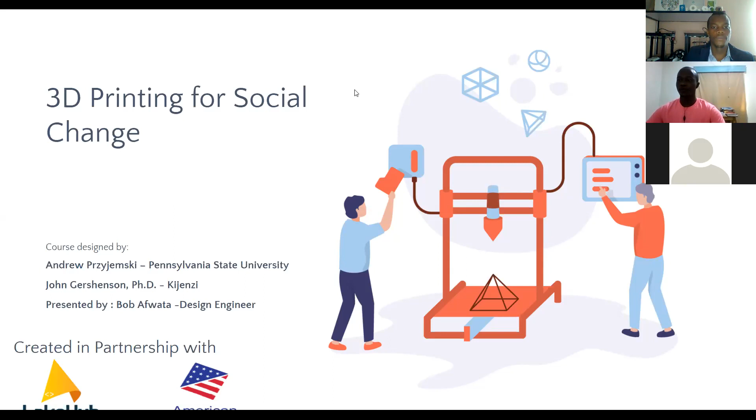So we are going to start with the first lecture. The course consists of 7 lectures or 7 classes. Around 3 of them are going to be theory, online on this platform on Zoom. Remember, we have 2 sessions, 2 cohorts: those doing the morning session from 10 a.m. every Saturday to 12 p.m., and those starting from 2 to 4 p.m.

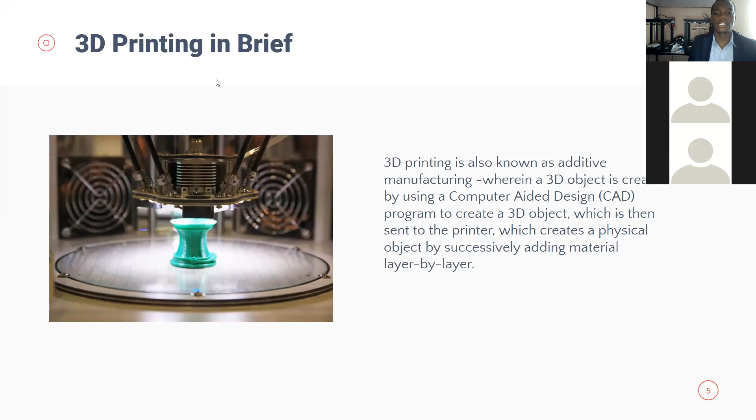Just know it is additive manufacturing, meaning the process works by adding material successively layer by layer, compared to other processes which remove or cut away material, such as CNC milling and laser cutting. So laser cutting and CNC milling are examples of subtractive processes, while 3D printing is an additive manufacturing process.

So why do we really need 3D printing, or what is the rationale behind 3D printing? 3D printing is a big business.

I'm telling you that the top manufacturing companies - if you go to top aviation companies, Boeing, Tesla, Airbus, NASA - there are 3D printing parts. And we are going to see that in the applications.

So it's a billion-dollar company, a billion-dollar process or market. It's a multi-billion-dollar market that is growing rapidly, and it's expected to continue growth into the future.

According to research, what is fueling 3D printing is that patents people applied for are just beginning to expire - some of them have already expired. That has made 3D printing pretty much very open, and people are really using those patents to build great 3D printers. The technologies have improved, like the precision of the laser or the motors used in 3D printing, and that has really spurred growth in this market.

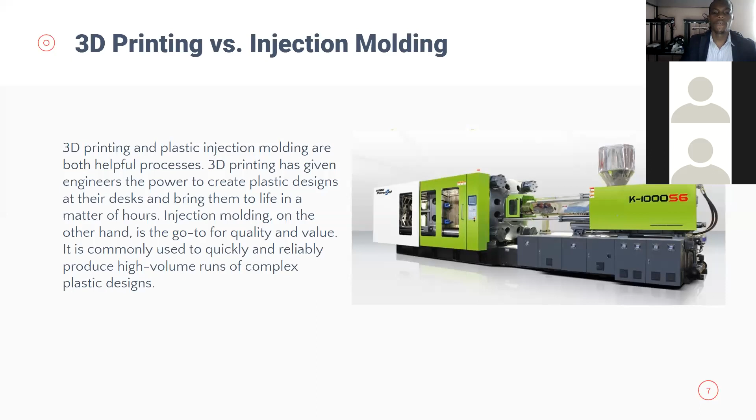It's a fast process, yes, but it cannot be used to manufacture 1,000 units at once. It can only be used to make prototypes or proof of concept. So if you compare the two, there is something called tooling cost.

Tooling cost is the cost of making a tool. In this case, there's something called a mold, which is used by injection molding. So if you want to make a mold, it's usually done using a CNC mill, milled or cut out of metal, wood, resin, or some other material. That cost is usually very high in injection molding.

But once you design it and mill one mold, you can be able to make maybe even 100 units at once. So due to the high cost of tooling, injection molding is economical for runs of hundreds of thousands of parts.

So if you want to make a cup, for example, or a syringe for biomedical use, if you look at the syringe, the inner part is made out of plastic, and the plunger is also plastic. Those parts need a mold, and that mold will have maybe 100 syringes in one block. So for every run, you'll be able to produce 100 syringes.

Making that part in the first place has a very high cost, but after you've made it, then it can produce at one point 100, at another point 100, even 100 units per minute. So by the end of the day, if you run the machine for like one day, you have produced almost 1 million syringes. So that is how they compare.

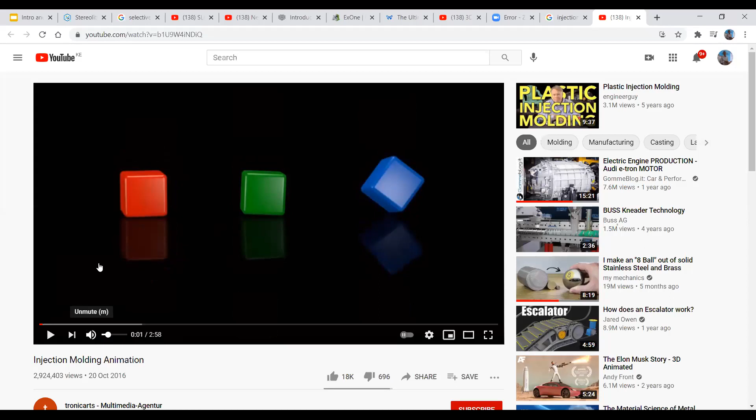Okay, so I have got a video which I need to show you. Just one minute, it's loading. I'll mute it but share the video link so you can see. Can you see my screen, on YouTube? Yes.

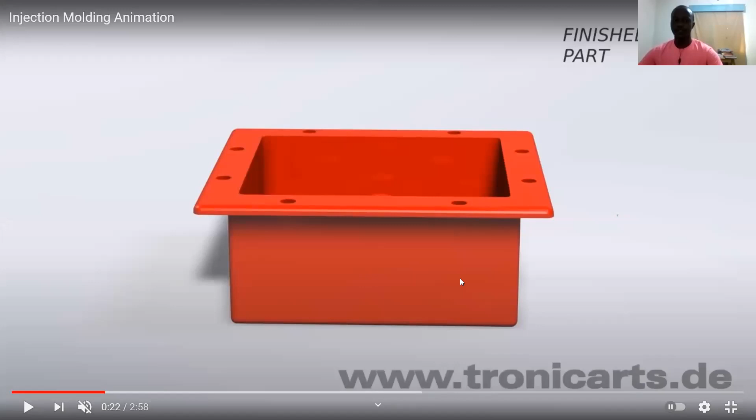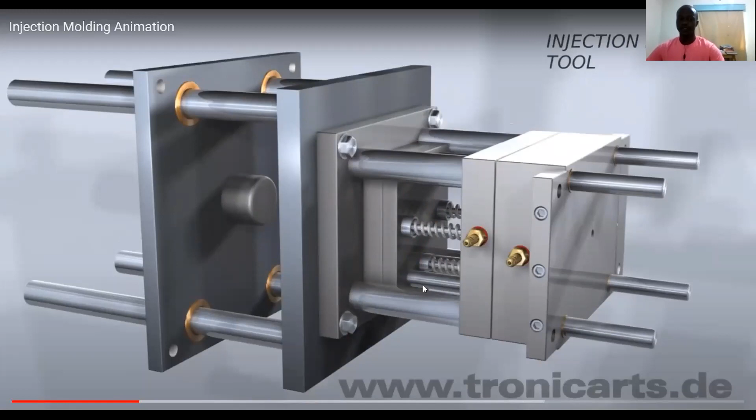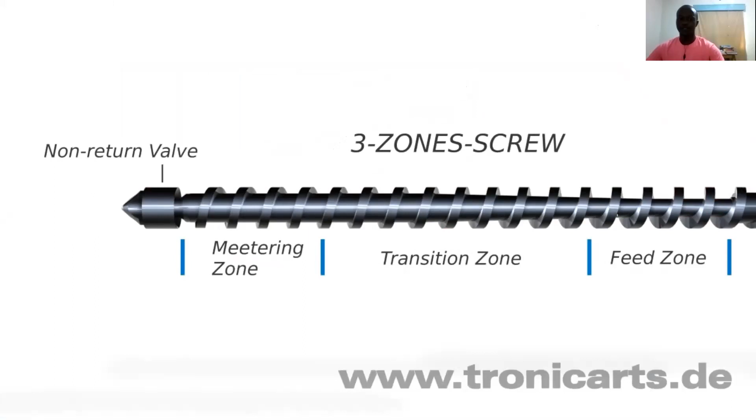When it gets heated up, it melts into liquid form. From solid plastic it becomes liquid, more or less like porridge. Then it's pumped into the rectangular closed chamber. So that's the plastic pellets being poured inside there. The black parts are heating elements, just like a coil. You can see that screw rotates to make sure the plastic is uniform, like it's being stirred, and then it's pumped into the enclosure or chamber.

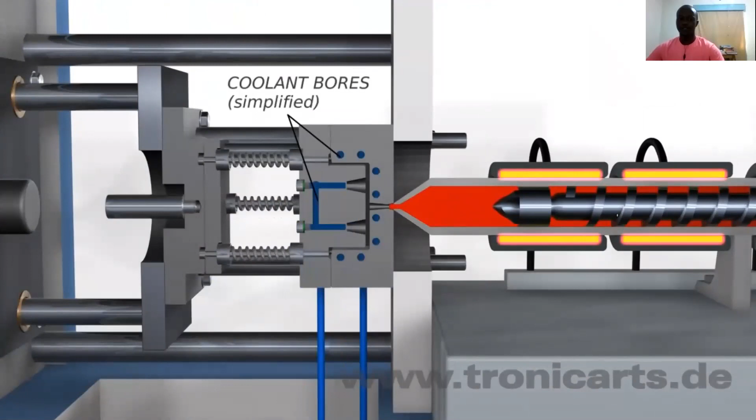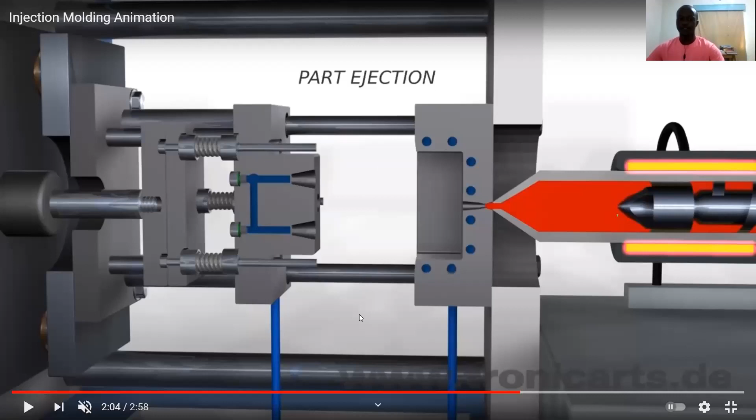Once it is pumped, because you have a pattern called the mold, it's allowed to form inside that pattern. Then your part, in this case a basin or a cup, cools and is dropped off. The middle part is what is called a mold, those two metal parts, one moving away and one moving towards the other. So it gets filled inside there, and then the plastic or your part gets dropped down, cools, and gets dropped.

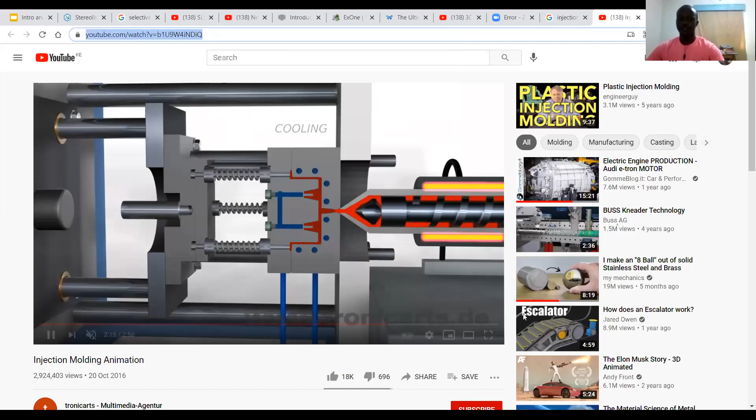Is that much clearer now, what molding is? Oh yes, it is, Jacob. Yes, so it is, but I have a question. Yes, ask a question.

My question is, do you need a specific printer for a specific design, or are you able to replace the mold for each kind of design you want? Because the shape of the mold looks like the basin you showed us earlier. So is it adjustable, or are you able to change that mold in the machine?

Yes, once you buy a mold with a specific machine, that mold is also designed. So if you are making different things, if today you're making a basin, you change that part. If tomorrow you're making a cup, or the next day something else, that mold is what you change. The mold is what you design, and then you change it in that machine. Using a 3D printer or a CNC machine, which is a milling machine. In industries, you go to places like Ken Poly, the guys making basins and cups. Most of the plastic you have in your house, like pails, are made there. They have various molds for various types of plastic, cups, plates, and all that, so they just keep changing them. If they want to make plastic cups, they put in the plastic cup mold.

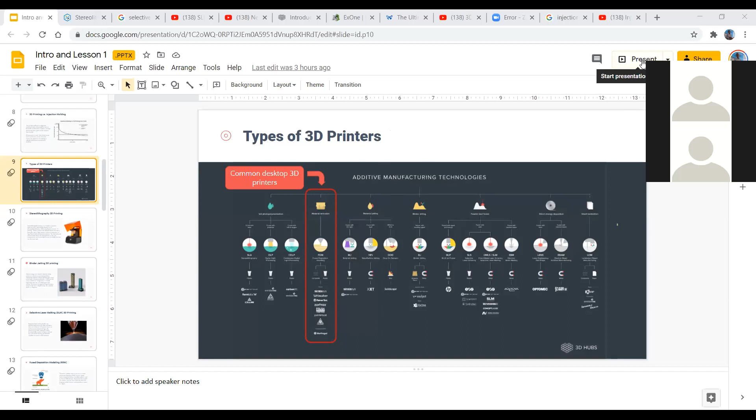I think they have educational tours as long as you let them know in advance. But I cannot promise to be the one taking you there unless you do it yourself, or maybe you can send me as your emissary, I can go there and try to talk with them. We can talk about that after the event. Those who are interested in seeing how injection molding works, I have seen it myself, but for those interested, we can go.

Before we begin, can I ask a question? The pellets, plastic pellets, do they have to be of a particular make or brand, or can you use any recyclable material as part of the pellets that are put in? You can use any plastic material.

But these materials are being treated. You cannot just take plastic like in your house and feed it there, because the plastic in your house may have something that has happened to it. The pellets are special, just normal plastic, but they have been treated with chemicals, they have been hardened, their properties have been changed so that they can melt easily and coalesce. When they are in the machine, they get stuck together and form that part easily.

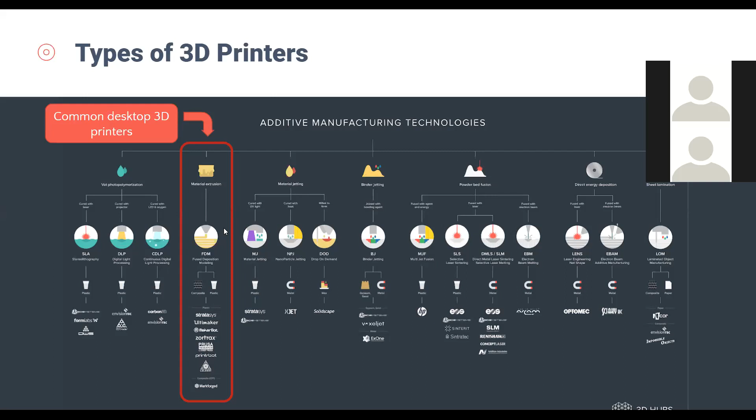So the first kind of 3D printing is called stereolithography 3D printer, or in short, SLA. Just know it as SLA 3D printer. Stereolithography is actually a chemical process. Before we even go to 3D printing, stereolithography is whereby you are using light - the light can be a form of UV light, ultraviolet light, or what is called laser. This laser light source, when it hits onto a material - a polymer, in this case one very common one called resin - that material gets heated, it gets hardened up. It turns from liquid form to solid form, it gets hardened. That is the process of stereolithography.

So how is it used in 3D printing? I want to show you a video here very quickly.

I'll also share this video at the end of the lesson, but this is how it works. It's a very short video.

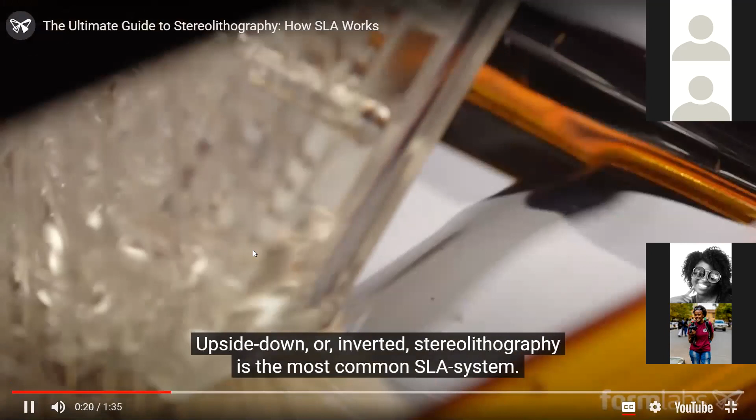So the first step, you've seen that he has explained.

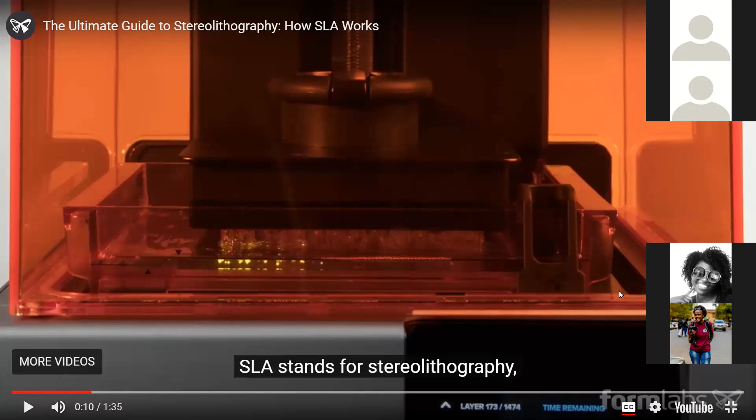So there is a resin which is in liquid form. There is a bed which is being lowered, and on that bed is where you are going to print your part. And you cure it - the light source is brought from behind or from below. The basic principle is that the light hardens the liquid resin, converting it from liquid to solid form. And then the part is formed, so you can be able to see.

So the light source is guided by this, it's some advanced mechanism, think of them like lenses or mirrors which guide the light source. The light comes from the bottom, and you can see the shiny or bright parts at the bottom. Then it hardens the liquid, which is in a bath or some form of a basin.

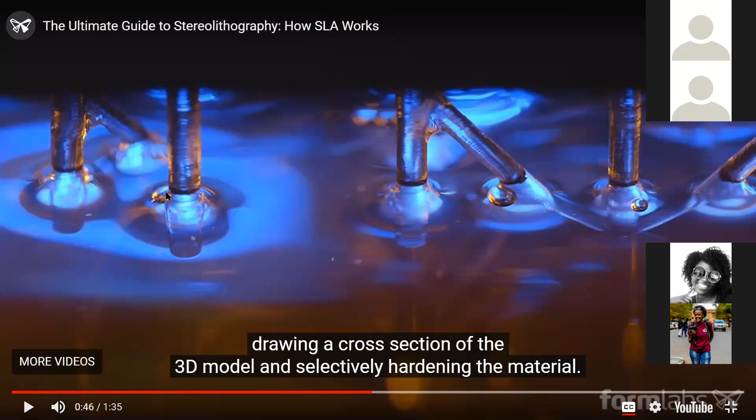These parts are hardened and your part is formed. So after hardening each layer, the bed where you are printing on gets raised up, and then you pour a new resin. Then after pouring a new resin, you harden it again using that laser, and as you do it consecutively, you form your 3D part. So that is what SLA or stereolithography is.

So in short, stereolithography belongs to a family of additive techniques known as VAT photopolymerization. Just know that it comes from the word photo, which means light, and polymer is a form of plastic. So these are forms of plastic which, when they get heated up or when you shine a light source to them, it changes its form from liquid to solid. So that is what is used here.

So a light source, these machines are built around the same principle, using a light source, in this case a laser or a projector, to cure. The process of hardening the liquid to form a solid is what is called curing. So you cure the liquid resin to form a hardened plastic.

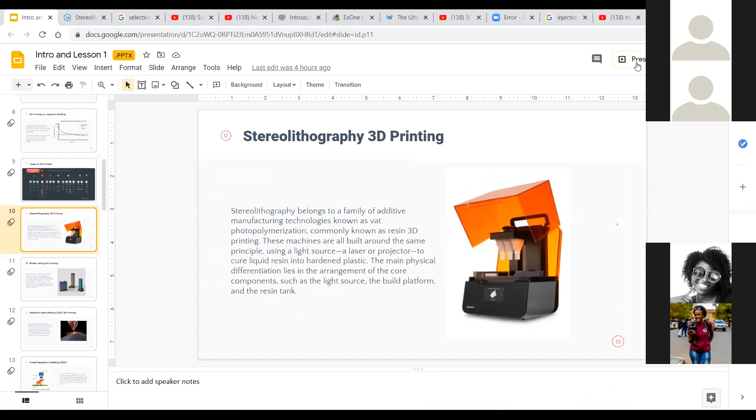Is there any question before we continue? Like how it works? Anyone with a question of how it works?

Yes, Bob, I have a question. You said in 3D printing we do a layer by layer addition—is SLA also using the same criteria? Yes, SLA also works in the same criteria.

Okay, so let's say you want to print this, then you lower the bed from the top. As you lower it from the top, the bottom is where you cure. So in this case, you are curing from the bottom, one layer upon one layer, as you bring this up on top. So that is how SLA works.

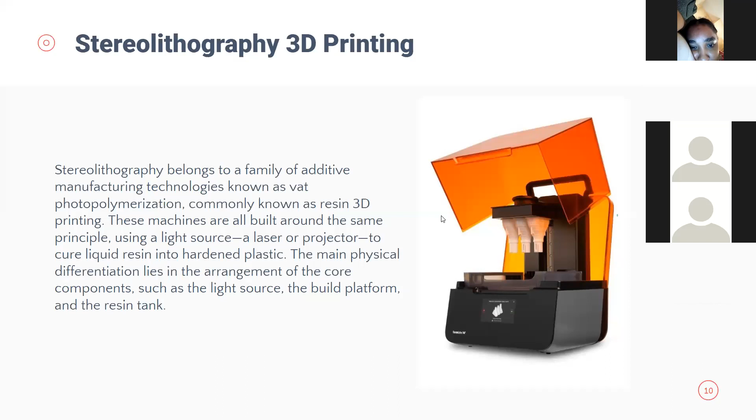Okay, the next is called binder jetting. So from the word binder—to bind something basically just means you have two solids and you want to bring them together. That is what is called binding. So in this case, I'll also share with you a short video of how binder jetting works.

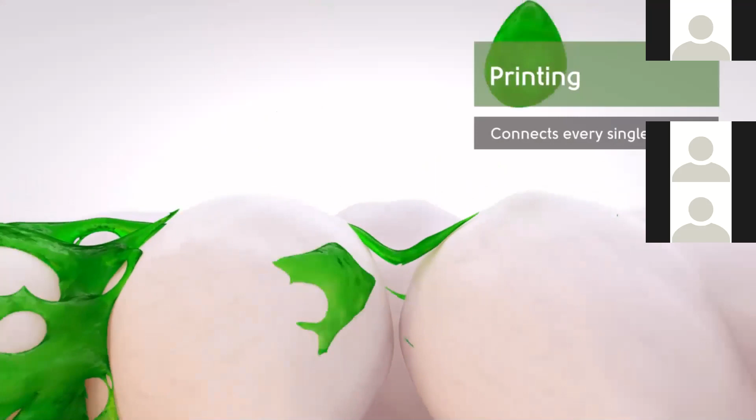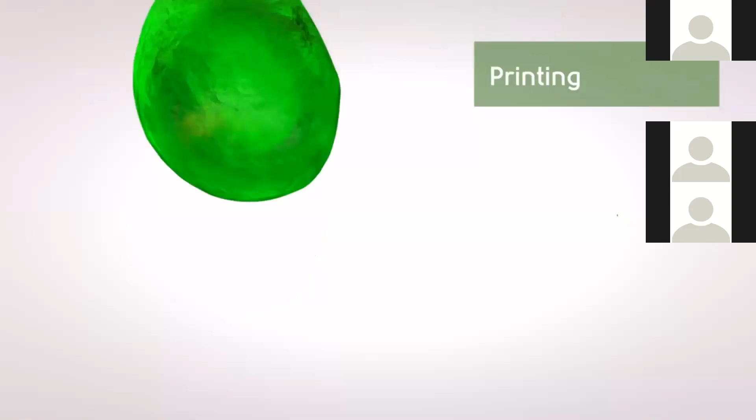So I'll just explain that. I know some of you have seen how construction works—for example, if you pour sand and you have cement, you pour sand then, like on a wall, you pour cement which has been stirred with water. What happens is the cement, when mixed with the sand, gets hardened, so the sand cannot scatter away. So that is the same way.

So in this case, the cement is like the binding material. So first, the first step is you pour a liquid, you pour a grain size—it's very tiny. Let me just show you that.

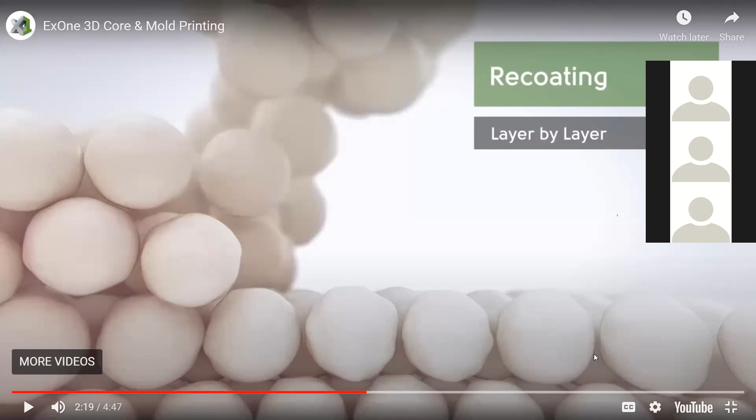At this point, the first head moves from left to right or right to left, and you can see it depositing very tiny grains, like the sand I'm talking about. So there's the size of the sand.

Each layer is placed above each other, like two layers of very tiny particles, just the size of sand particles. After doing this, a head moves on the platform from left to right, and then the next step is printing, or placing the binding material. Think of it like cement, which when poured as liquid or mixed with water onto sand, binds the sand particles together so they cannot scatter away.

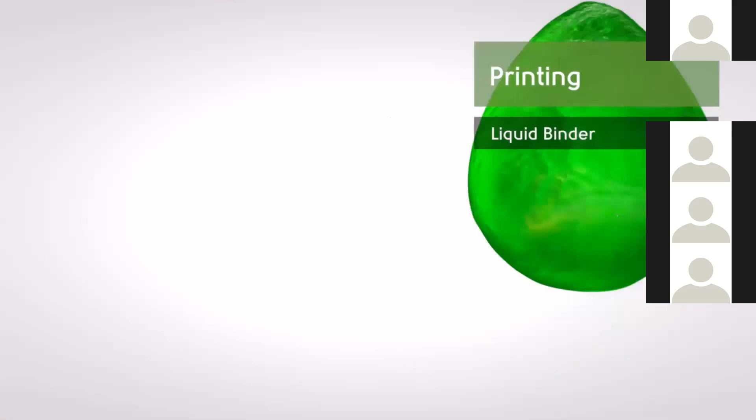You can see the white circular parts, the white balls, representing the original material you want to print from, something like sand - they are just the size of sand, very tiny. The green material, poured in the second layer, is the binding material. When brought together, it binds the spherical balls together to form the hard part, so the pattern is formed.

That is how your pattern or object is formed. Remember, this is an additive process, because you are adding material - you add the white material, then follow with a layer of the green binding material, to form your 3D object.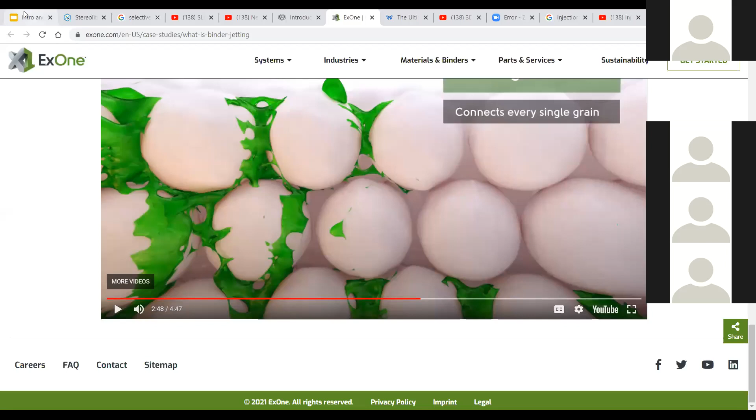I'll take questions once we're done. So the binder jet is an additive manufacturing process. It uses an industrial print head which selectively deposits material - we don't deposit it all over, only where you want to print your part. For example, if printing a model of a house, only where the walls are or only where the windows are is where you deposit the material.

So it's deposited selectively - you deposit the liquid binding agent onto a thin layer of powder. The first stage is depositing a thin layer of powder, just the size of grains of sand. This can print out of metal, sand, ceramics, and also some composites. Then you deposit the binding material on top to build high value and one-of-a-kind parts and tooling.

The process is repeated layer by layer. The first round, a layer is formed; the second round, a new layer is formed using the map - your digital design file which you created - until the object is completed. That design creates a map of where you are going to place the binding material, placed by the second print head, which binds the powdered material together. This continues to form your 3D object.

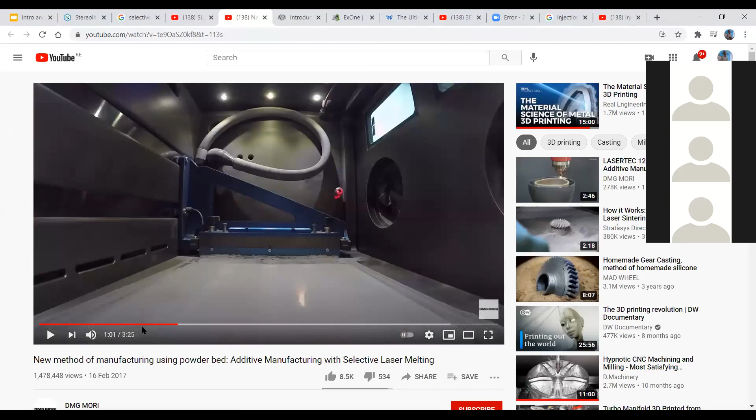So can you guys hear me? Are you guys together? Yes Bob, I can hear you. Yes, yes, yes, okay.

So yes, SLM is whereby you are going to use a laser. A laser is just a source of light that's very intense - it can even burn, cut metal, or melt metal. It's a highly concentrated source of light. If you've heard of laser cutters, it's very sharp, focused light which, if put on any material, can melt plastic, melt and even cut metal, cut ceramics, cut a lot of material. This is what is used to melt a powder of the material, and you will see how it's done.

The first case is very similar in a way to binder jetting, but in this case we are using the laser to melt the powder. So what is burning there is the laser.

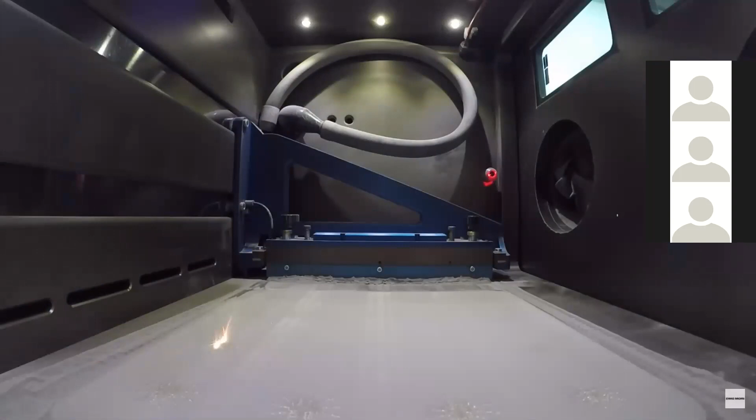So the bottom, the white part, is actually gray. That is powder metal, something like steel powder in powder form, or iron in powder form, very tiny powders. Then what is burning there from the top is a laser source, a source of laser light. As it moves according to your pattern, it melts and brings the particles or the powder together by melting them. During that, it no longer becomes a powder, but it forms the 3D layer of your part.

Once you harden them, you can see this moving head, the blue part at the top. The blue part is depositing a very thin layer. You can see the blue material being added is a thin layer of that powder. In this case, we are talking about metal powder or ceramic powder. So the printing head deposits or adds a new layer. You burn a layer, and after you've burnt a layer, then you add a new layer of that material.

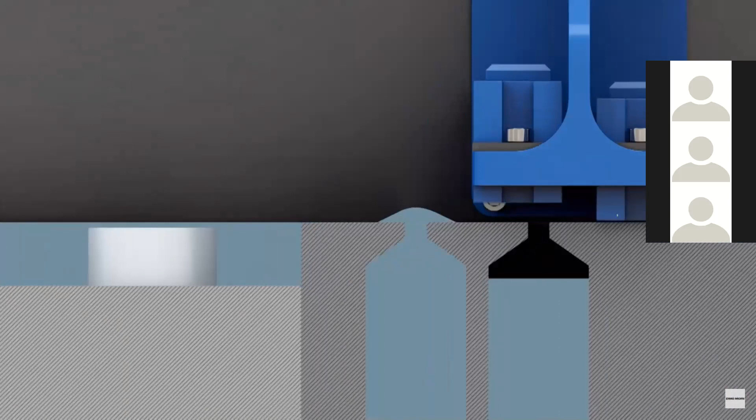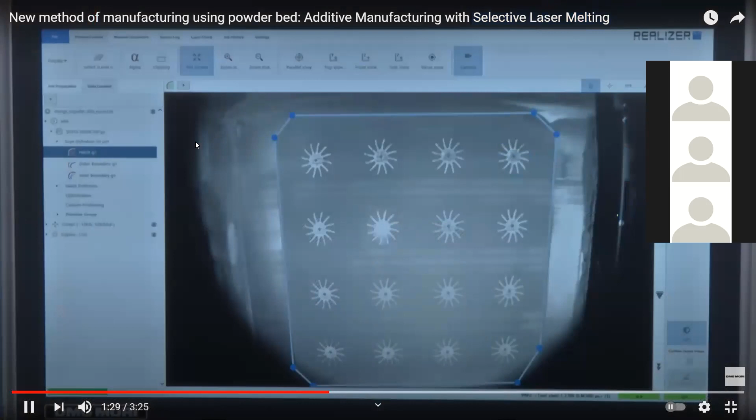So that is the head adding, it's adding a new layer.

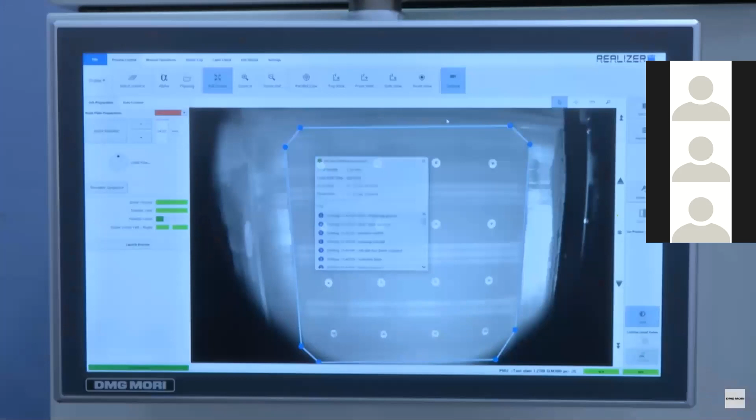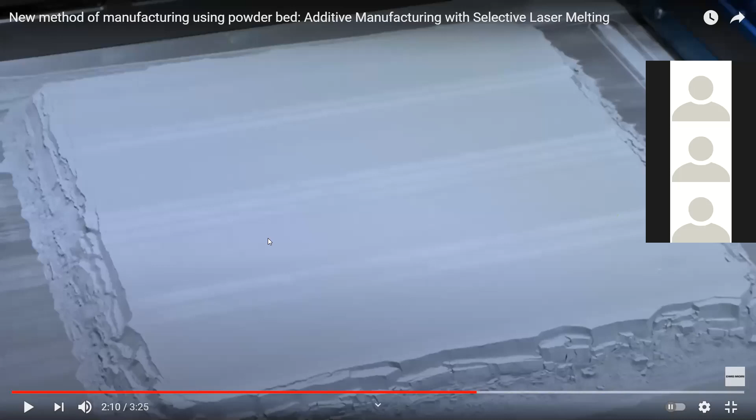Now I want you to see there, the gray material which is peeling away, that is the powder which was placed on the bed. As we push it upwards, remember the parts which have hardened, it's like having a cup buried inside the flour or inside the sand. When the sand is moved up, or the container is moved up, the hardened part peels off, or separates from the powder. In this case, the powder of the metal, and then there is your hardened parts which have been melted together. That forms your 3D object.

So you can see what's happening here. This is the part which we have formed. There is the powder which has not been hardened or melted, but there is the material. In this case, it's something which looks like a gear or a fan of a machine. So this one has been hardened, or molded layer by layer to form the 3D part.

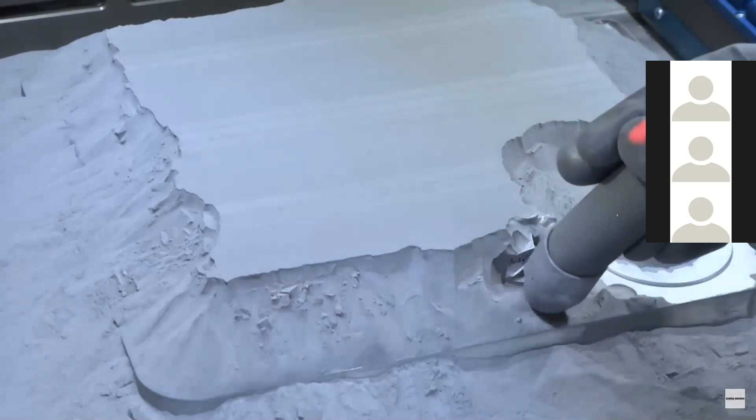So that person is just sucking up the excess material.

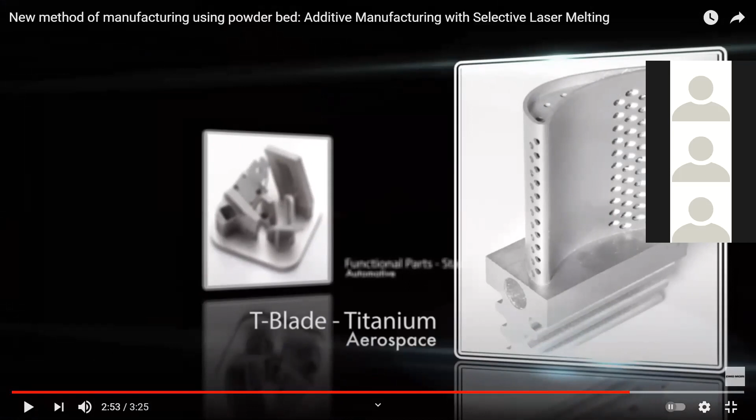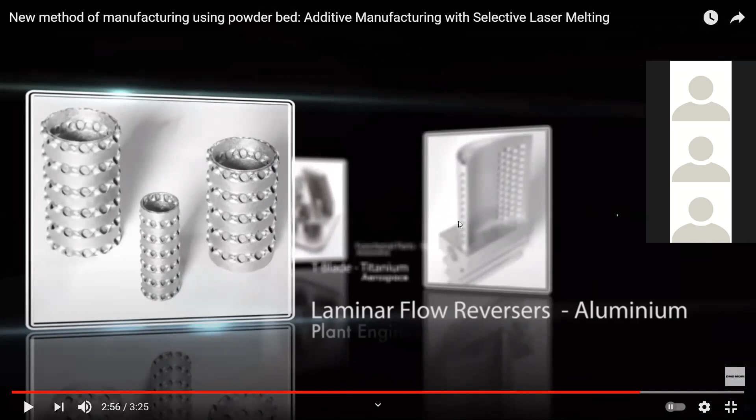Yes, and as you can see, it can be used to make very complicated or very interesting designs. It can also work with various forms of material, from aluminum to titanium. Titanium is one of the hardest metals out there. And parts like engine parts of a vehicle or an aerospace or aeroplane, this can be able to do.

Yes, so that is what SLM 3D printer is. It works very well with metal. Just know in short, it uses a laser to harden the material, or to melt the powdered material to form your 3D object.

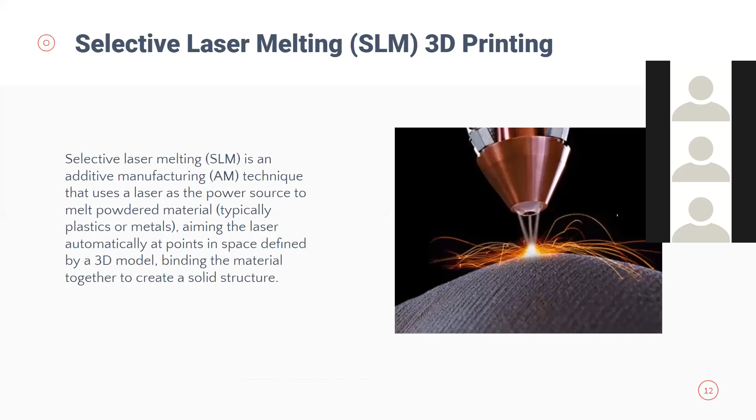Then the most common one which we are going to use is what is called fused deposition modeling. This is the one which even I have at my back here. Most of you are going to see it in action when you come physically. This is what you will find out there. So it uses something which is called a filament.

One minute. So this is what is called a filament. Can you all see it? Yes, we can, Bob. Yes, yes.

So the filament is just plastic which has been made in the form of a strand. It's a strand of plastic. They come in various thicknesses, or the diameter is different. Like this is like 3 millimeters. So this is what is fed into the machine.

Remember the other cases we were dealing with liquid for SLA, and for SLM and binder jet we were using the material in terms of powder. But in this case, it's a solid. It's a strand, or it's like a string of the material.

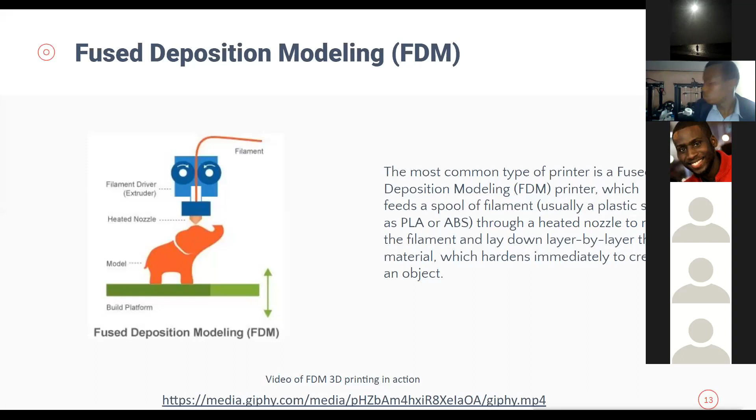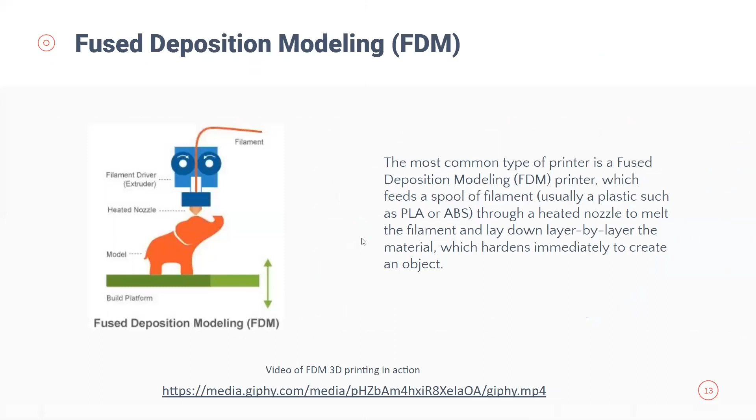So yeah, if you see there, there are various types of filaments, but let me explain this better. The most common type of 3D printer is called fused deposition modeling, or FDM printer. So this feeds a spool of filament. I have shown you, this is how a filament looks like. There are usually two types, PLA and ABS.

It is fed into a heated nozzle, which consists of just an element. Just think of it like a coil, a coil of wire which, when you feed electricity to it, gets hot. And then when it gets hot, it melts the plastic. In this case, it's what's called PLA and ABS. And then it melts it to form a liquid.

So the liquid is put layer by layer. I think I shared a video of how the printing happens, but I can share another one again on the WhatsApp group so that you see how the layer is placed layer upon layer of the material. The layers cool, and then they harden to form your 3D part. In this case, it's a model of an elephant that you can see.

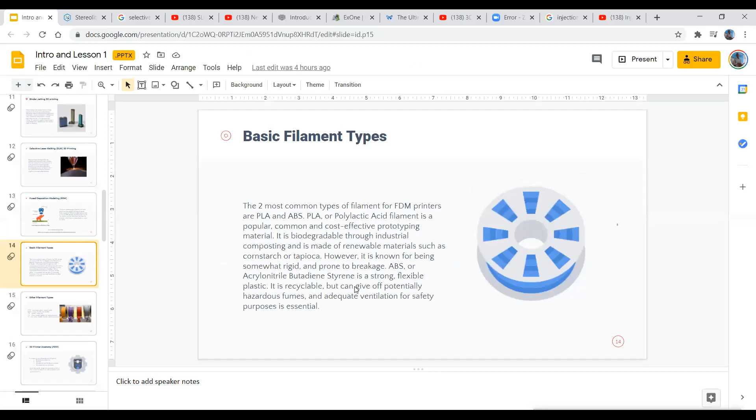Then there are two types of filaments that are out there. I'm just looking at time - it's 11:29, so that we don't get late.

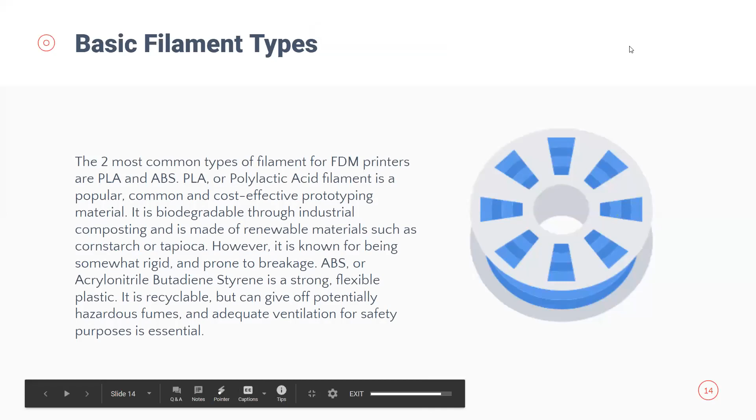So the types of filaments that are there are two main types: there is PLA and ABS.

Somebody was asking me, where do we get these plastics? We source them from 3D printing houses or companies. There is one called Nerocast, which is in Thika. There is also another one called Pixel Electric. You can also basically just order them online, from AliExpress or Amazon, or whichever part you order things from.

But locally, there are a few places which I know sell this. A big shout out to Nerocast. There is also Pixel Electric. There is also a company that actually sells 3D printers - I'm forgetting their name, I'll share it with you - they also sell the 3D printing plastic, or what is called the filament.

So what is PLA? PLA in short is a short form of something called polylactic acid filament. It's very common - even what I am having here is PLA type. They are cheap, or low cost compared to the others. They are a low cost effective prototyping material. So what I have here, it's not ideal for making a final product which you can sell to someone in the market.

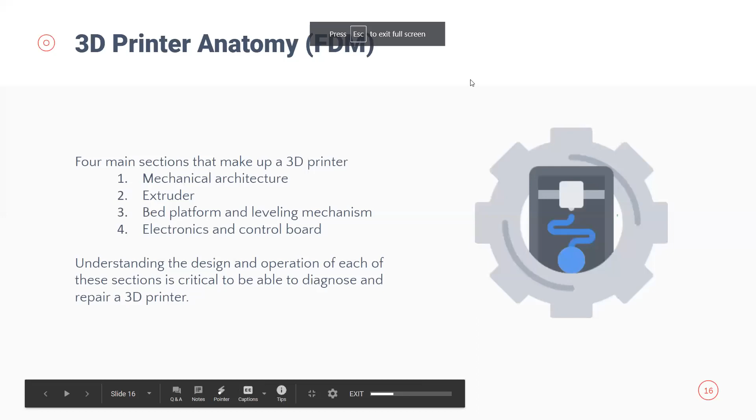It's Ian. Hello, can you name the types of 3D printers that you have? Yes, my name is Imanthu. I think the most common one is the one that you explained, the FDM, the fused deposition modeling.

Then we have selective laser melting. There's also binder jetting and stereolithography. Thank you, mentioned very well—there are four types. FDM is the most common one, which uses filament; it's the one which we are going to use. Then there is SLM, selective laser melting, used on metal, ceramics, and all that, even plastics. Then we have binder jetting, and then stereolithography, or what is called SLA printers.

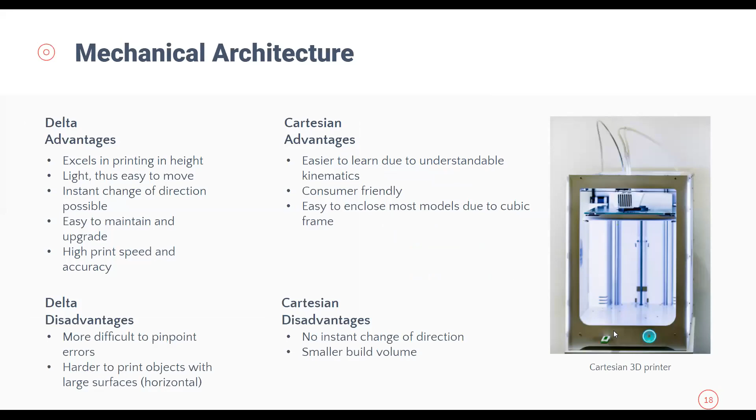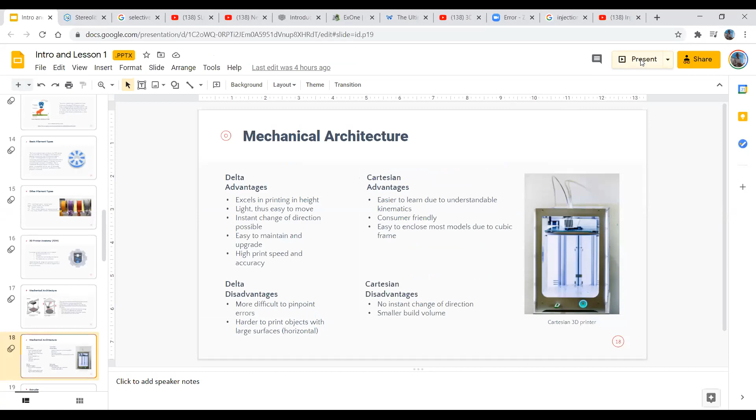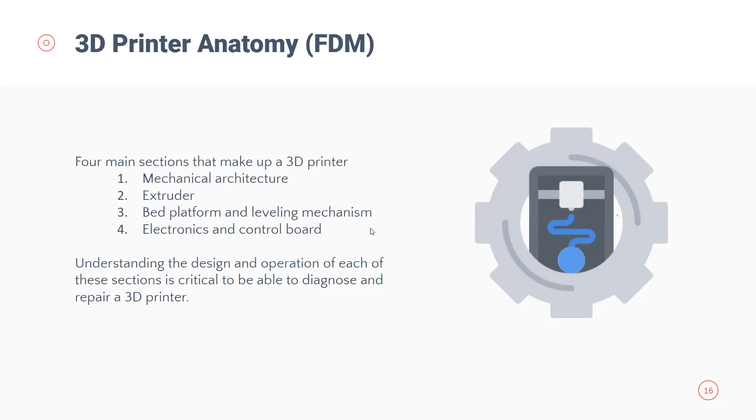So there is what is called the anatomy. The anatomy is just the various parts of the 3D printer. The type of 3D printer we are going to focus on is FDM, or fused deposition modeling. It consists of 4 parts: the mechanical structure or architecture, the extruder, the bed or platform with the leveling mechanism, and the electronics and control board. So if you have a printer, there are various parts, just like your phone or device has various parts.

So the first part is the mechanical architecture, or the mechanical part. If you look at the printer here, there is the mechanical part, made out of extruded aluminum, which forms the case or body of the printer. There are aluminum parts that form the case, or housing, for the printer. Then there is the extruder, which is on top here. You'll see how it works. We are going to go deep into it.

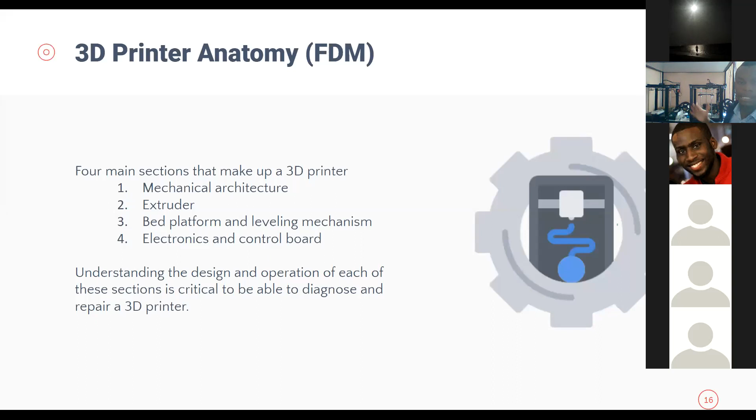Then there is a base, where the printing works, or where the printing goes on. Let me set this to print something, and you'll be able to see when it's printing. So this is the base where it's going to print, and then there is a bed. This base has a leveling mechanism. There are some springs at the bottom which you rotate, and as you rotate it, you can set the base properly so that it can print well.

Then we will start with the mechanical architecture. There are 2 types of mechanical architectures. One is called Cartesian — if you remember your maths, Cartesian coordinates, the X, Y, and Z. So it's this type that we have here. It basically has an X-axis, this side from left to right. This is the X-axis, generally from left to right like that. Then there is a Y, from this side going inwards — that is the Y-axis. And then the Z-axis is from top to bottom.

So basically it's just like a box. If you have a box, there's the length, the width, and the height. The length, from this side left to right, makes up the X-axis. Then from one end to the other, to the bottom or inwards, that forms the Y-axis. And the Z-axis is from top to bottom. You'll see the printer labeled X, Y, and Z — those are the 3 axes. So this is a Cartesian printer.

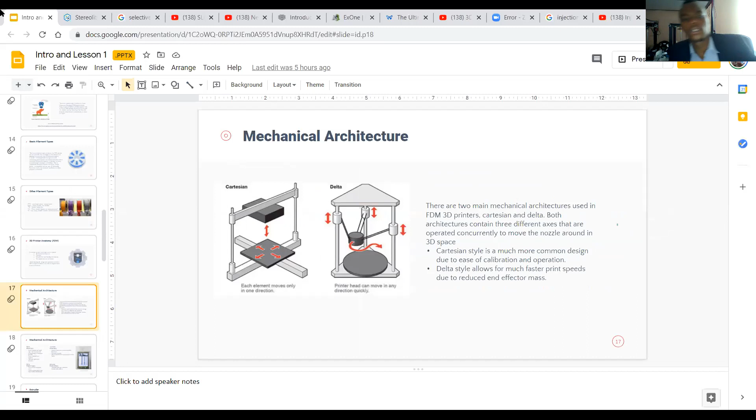Let me just show you a quick video. Let me go to YouTube really quick and show you.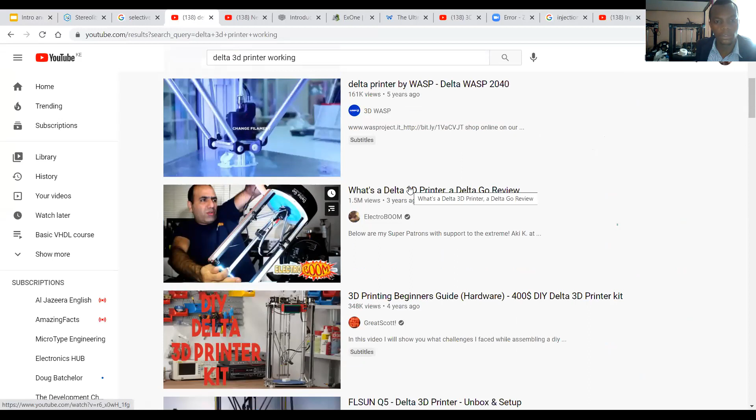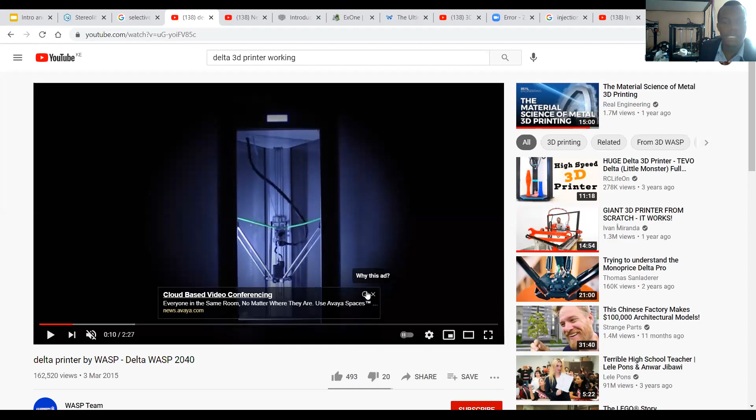So the delta has the base in a circular form, it's round. This is an example by Delta Wasp 2040. You can see the extruder, where the plastic is emerging from, is that middle black part. Yes, that is the extruder, and it moves in a circular motion — it does not move in straight X, Y coordinates.

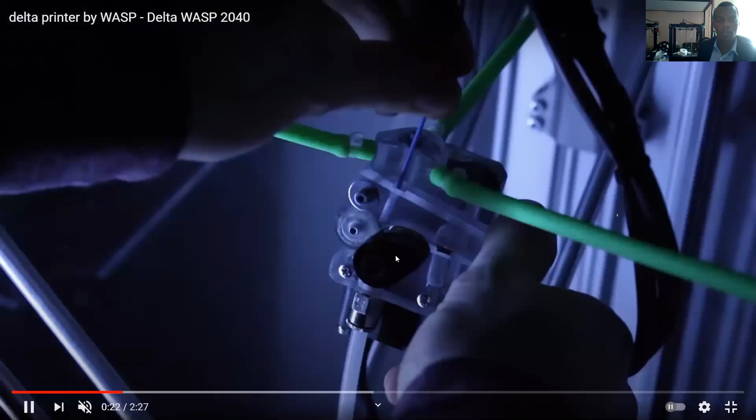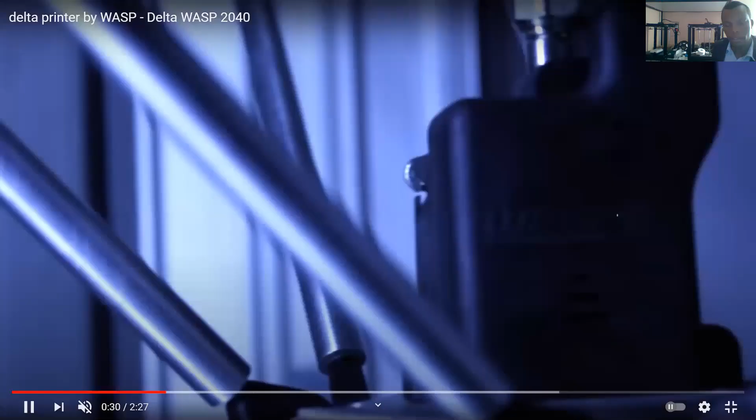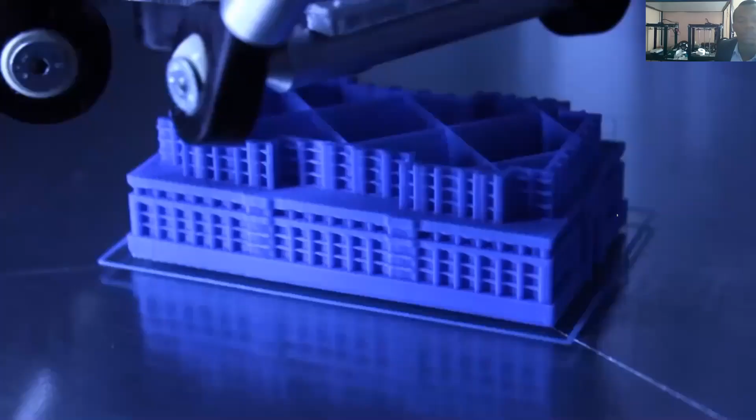So what that guy is doing is loading the filament — the green piece of plastic strand coming in. What is feeding it is called the filament. As you can see, the plastic was in solid form, but now it's oozing out in the form of plastic. You can see it rotating, moving in a circular manner around that bed, and it's printing. Yeah, that is how it's printing. So you can see the bed is...